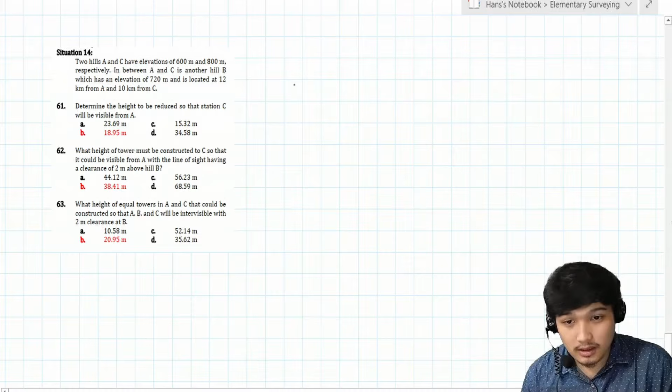I-clarify ko lang, kung paano ba mag-drawing ng horizontal line. Baka kasi ang pagkakaintindi niyo is that yung horizontal line is always ganito yung orientation, talagang horizontal.

Ang pag-drawing ng horizontal line is dependent doon sa vertical axis. Sa case na to, itong horizontal line na to is applicable kapag ganito yung surface. If the surface is horizontal, therefore yung vertical dyan is pag ganito. So with respect sa vertical, yung horizontal line o yung line of sight ay drawn perpendicular sa vertical axis.

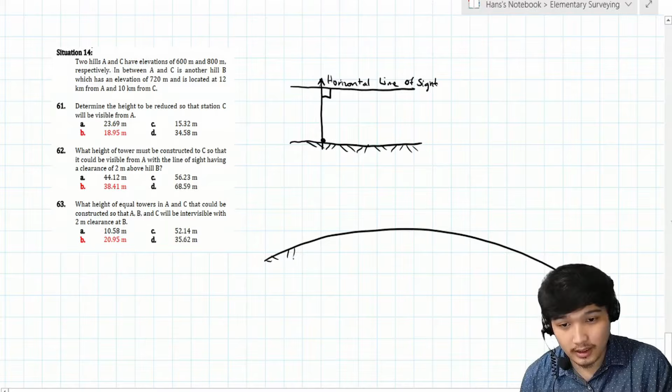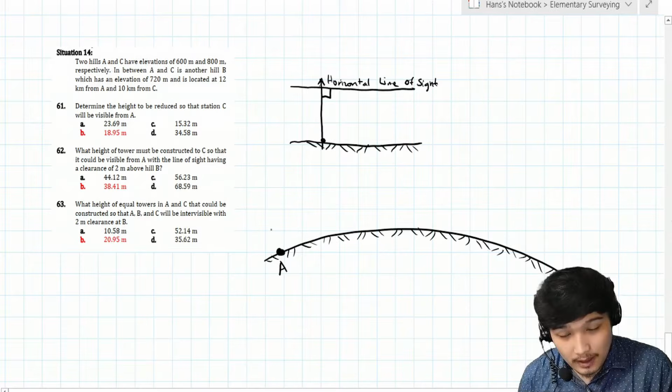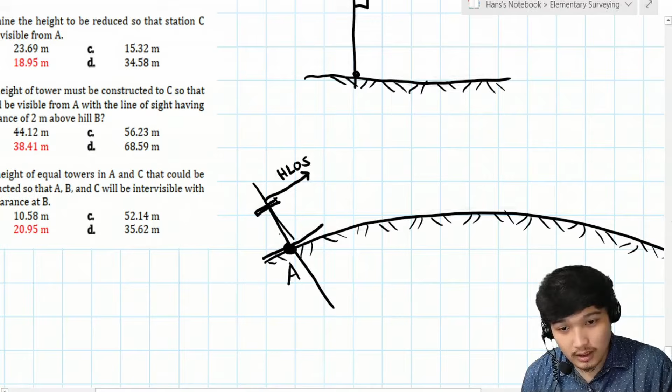Sa cases na may effect na yung curvature, i-consider natin itong point na to, let's say point A. Ang gagawin natin ay mag-drawing muna ng vertical axis dito, na perpendicular sa tangent line dito sa A. So ito yung tangent line at A, at ito yung vertical axis niya. Kaya yung horizontal line of sight with respect sa point A ay ganito, katulad nung tangent line. Kung ano yung direction ng tangent line, ganun din yung horizontal line of sight. Ito yung horizontal line of sight kapag kino-consider natin yung instrument at A. Gets ba yan? Practice pa tayo.

Let's say ito, point B. Drawing tayo ng instrument. Mapapansin mo dyan, ito yung vertical axis naman niya, drawn perpendicular sa vertical axis. So ito yung kanyang horizontal line of sight. And then, ito sa C.

Drawing tayo ng vertical axis. Therefore yung instrument nakaganito. Again, drawn perpendicular sa vertical axis. So ito yung kanyang horizontal line of sight. Hindi siya laging horizontal.

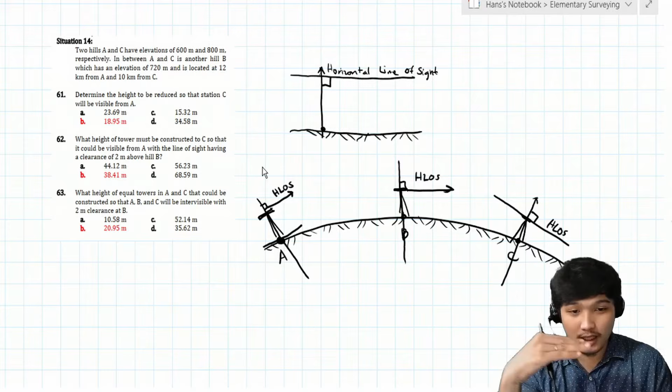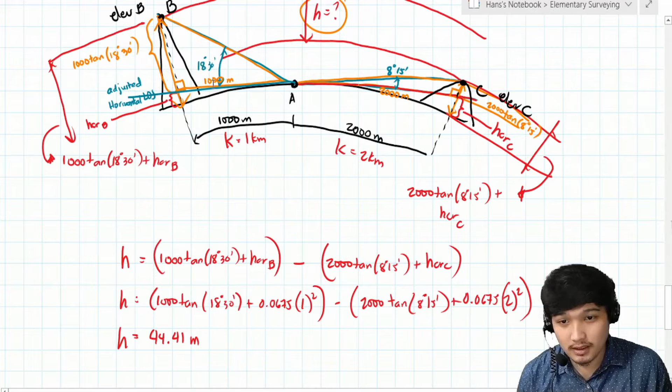Yun yung naiisip niyo, pero depende siya sa surface. Kaya kung babalikan natin, let's say ito yung pinag-uusapan is point A. Nakikita mo, yung horizontal line of sight dyan ay para talagang horizontal. Habang dito, kasi hindi ko na-discuss yata sa previous video ko, kung mapansin mo, itong horizontal line of sight na to ay parang hindi naman siya horizontal. Pero kasi yung instrument na i-a-analyze ay at point A.

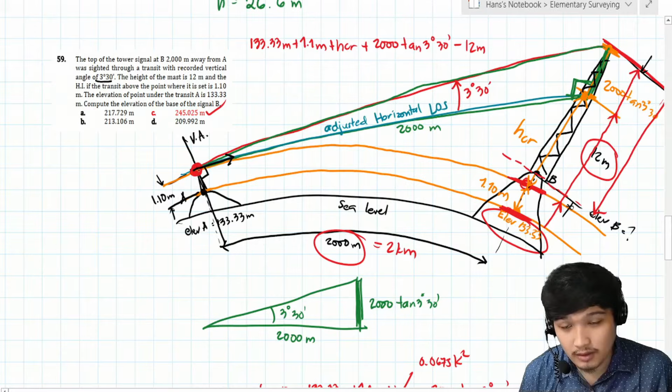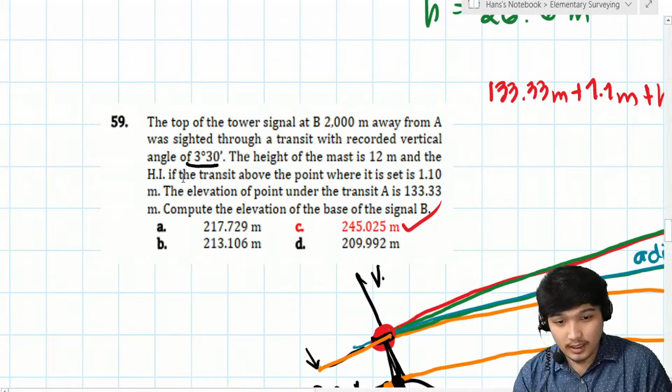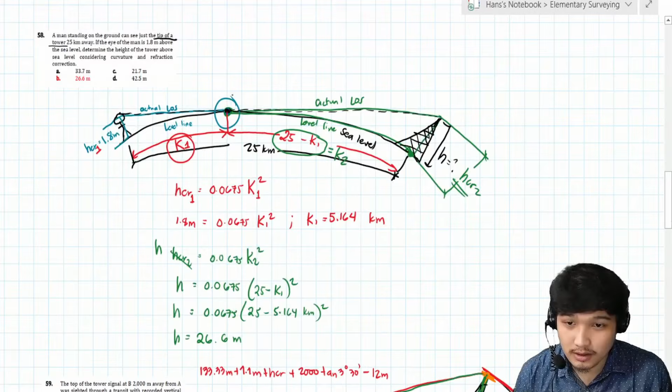Kaya therefore, perpendicular sa surface at A, ito yung vertical axis. So ito yung magiging perpendicular sa vertical axis na yun, which is yung horizontal line of sight ng instrument at A. Sana gets yun. Burahin ko lang. So dito, yung kino-consider, yung point na tumama sa surface ay itong nasa gitna. Yung horizontal line dyan ay ganito yung orientation niya. Sana nagets na kung sakaling naguguluhan ka kung paano mag-drawing ng horizontal line of sight.

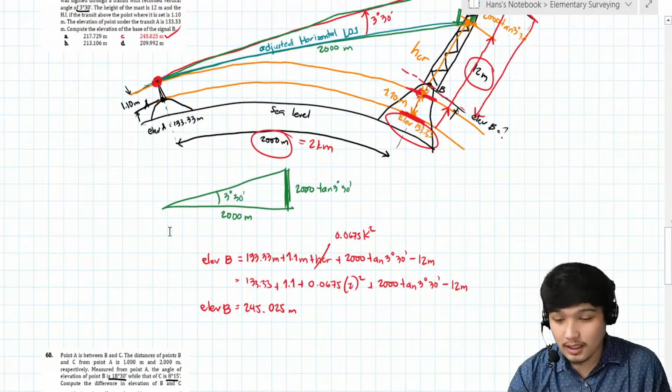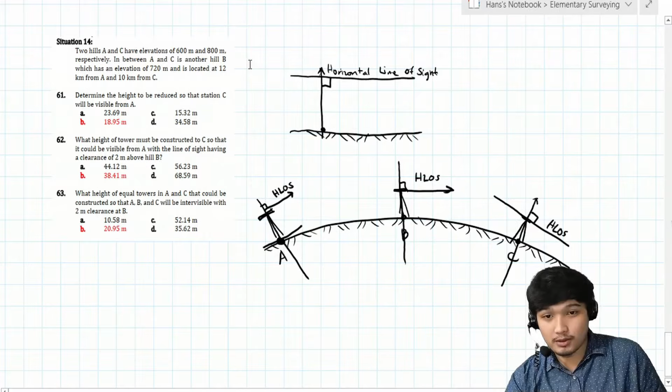Proceed tayo sa discussion ng last sample problem natin, application ng curvature and refraction sa ating measurement. Burahin ko to.

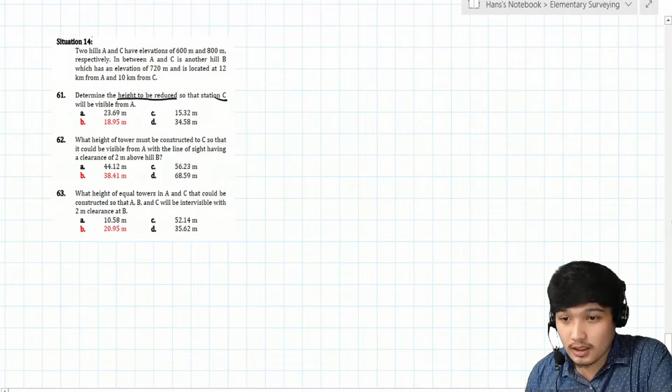Sabi dito, two hills A and C have elevation 600 and 800 meters respectively. In between A and C is another hill B which has an elevation of 720 and is located 12 kilometers from A and 10 kilometers from C. Tinatanong: determine the height to be reduced so that station C will be visible from A. Next, what height of the tower must be constructed at C so that it could be visible from A with line of sight having a clearance of 2 meters above hill B. And then, what height of equal towers in A and C could be constructed so that A, B, and C will be intervisible with 2 meter clearance at B.

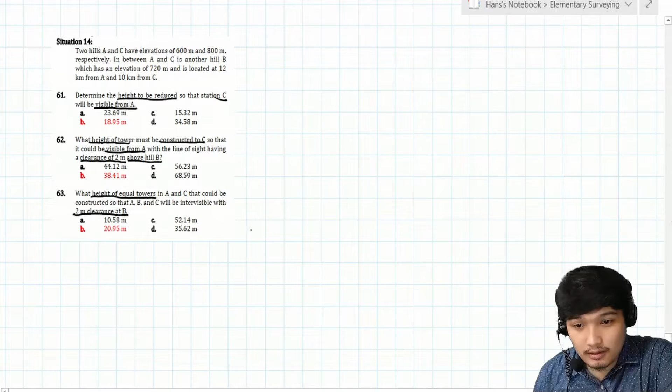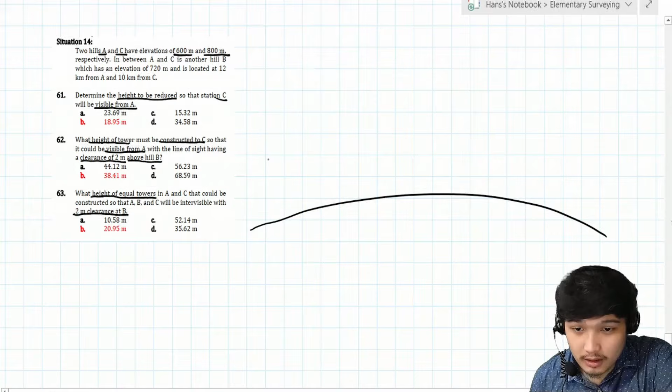I-analyze muna natin yung mga binigay na given. Let's say ito yung sea level muna tayo. Hill A, 600 meter elevation, at hill C is 800 meter elevation. Drawing ko siya pag ganito. Ayan, yung elevation niya, itong height na to ay 600.

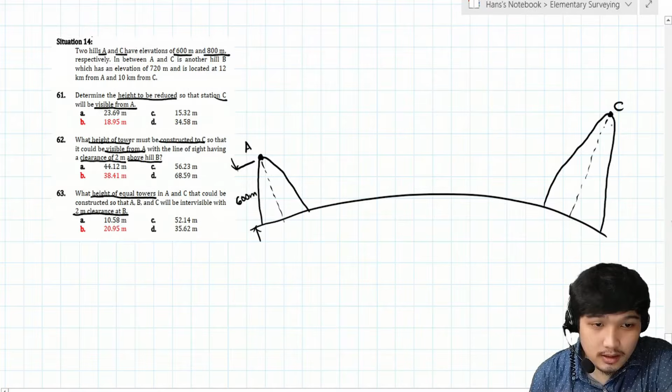While yung sa C, let's say, somewhere here, dito siya located. So, ito yung C. So, lagay ko to A. So, C. So, ang height naman niya is 800. So, nakikita ba? Okay. So, sabi, in between A and C is another hill B which has an elevation of 720. So, 720.

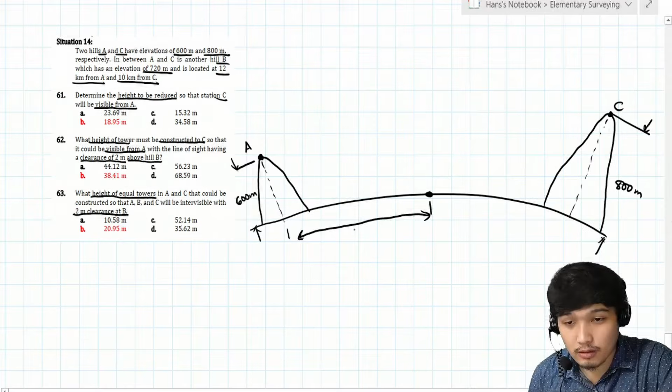So, let's say, ano ba yung location class? So, sabi, di ba, located siya 12 kilometers from A and 10 kilometers from C. So, let's say, dito na lang siya, no? So, lagay natin yon. So, from A. So, pinakita ko class na curve na yung surface kasi nga, malalayo na yung mga distances na involved. Okay, so, malaki na yung chance na may effect yung curvature dito sa ating mga measurements. So, ito is 12 kilometers and then ito is 10 kilometers. Okay, so drawing tayo dito ng hill na around 720. So, let's say, ayan. So, B. Then, ayan, no? So, 720

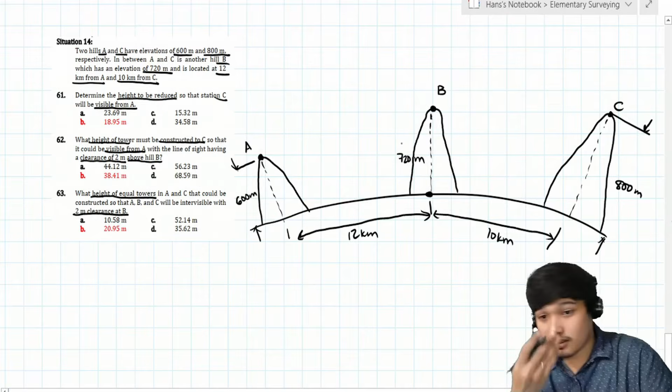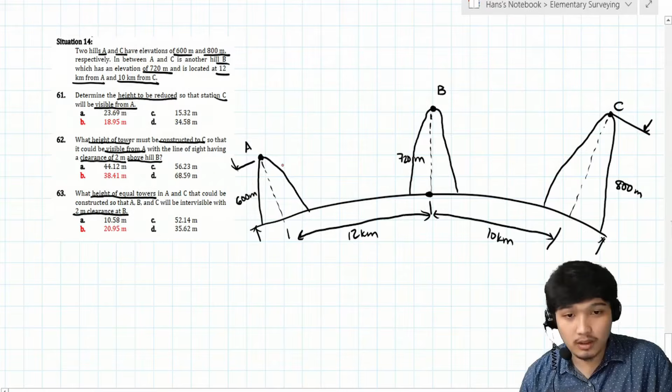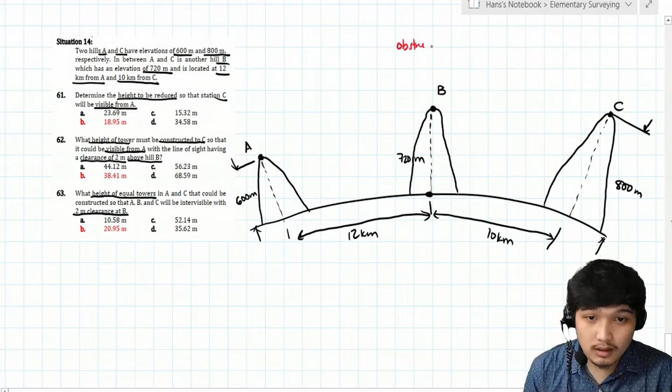meters. So, ang tinatanong dito class, no, is determine the height to be reduced so that station C will be visible from A. So, ang gagawin pala class is from A, isa-site niya yung C. So, class, sa problem na ito, merong two possible cases. So, yung isa is that yung B is maging obstruction siya. So, sulat natin. Or may clearance.

Okay, pag sinabi nating obstruction, so ibig sabihin na hindi niya class makikita yung point C, no, from A kasi may harang. Yun nga, obstruction siya. So, nakaharang yung hill B. So, hindi visible ang point C from A. So, kapag naman may clearance, so ibig sabihin, yung line of sight is makakatawid siya from point B. So, ngayon, since sinabi naman sa atin na height to be reduced, so baka ano siya class? Obstruction. Okay? So, assume natin na obstruction siya.

So, yung line of sight natin is ganito. Ayan. Okay, so ito na yung line of sight, no, from point A to point C. So ito yung tinatanong sa ating class. Ano yung height na kailangan nating ibawas sa hill B para maging visible yung point C from point A. So, class, paano sagutan yung ganitong type ng problem? So, simple lang, class, no?

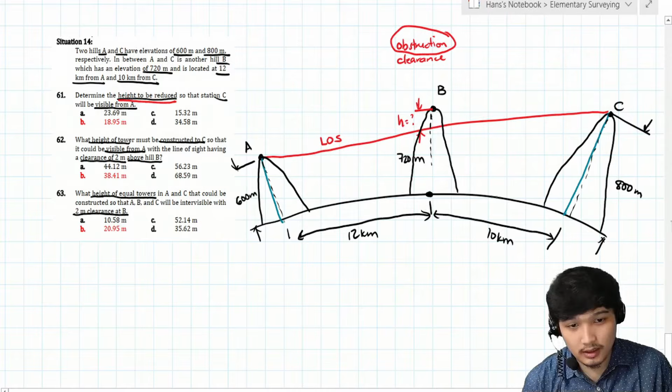So, kung mapapansin mo, class, sa figure natin, para tayo may trapezoid dito. So, ito yung isang side. Ito yung isa pa. And then, yung line of sight na to. And then, itong sa baba na naka-curve. So, parang may trapezoid, class, kaso hindi talaga siya trapezoid. So, ang gagawin natin, class, i-convert natin yung figure na yan into its equivalent trapezoid. So, imbis na curve sa baba yung gagamitin natin.

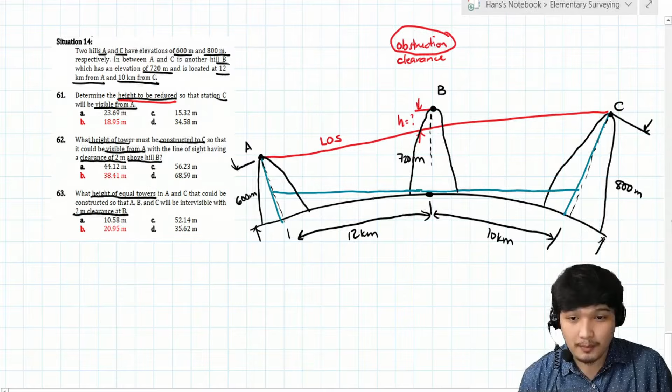So, mag-drawing tayo ng tangent line dito sa point sa may B. So, drawing tayo ng tangent line dito. Ayan, tangent line. And then, extend natin. So, assuming yan yung parang horizontal line. Okay, horizontal line of sight drawn at point B. So, ayan. So, therefore, class, etong height na ito will become yung HCR nung A measured from B.

So, di ba, class, ito yung horizontal line natin, drawn at B. And then, makikita mo, yung horizontal line of sight is again, lumalayo na naman siya dun sa etong level surface. So, ibig sabihin, yung paglayo niya na yon is denoted by the HCR and then A, para sa HCR for point A. So, therefore, ang gagamitin natin K distance dyan is ito. Okay, which is yung 12 kilometers. So, KA. So, pag nakuha natin yan, class, makuha na natin tong equivalent height dito sa side, sa may A nung trapezoid natin.

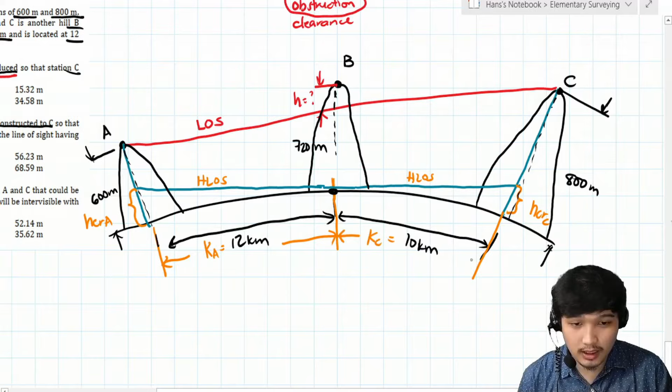Okay, so let's say dito naman tayo sa kabila. So, again, from the horizontal line of sight from B, lumalayo na naman siya from the level surface. So, yung paglayo niya na yun is yung HCR and then for C naman. So, ang gagamitin natin, class, na K value is from B, again, papuntang C. So, ito yun, no? KC equals 10 kilometers. Okay, so kunin muna natin yung mga values ng HCR. So that HCR A is equal sa 0.0675 of KA squared. So ilan to, class? So that is 9.72.

So, ibig sabihin, i-deduct natin yan doon sa initial elevation, na 600. Okay? So, next, yung HCR C. So, that is 0.0675 of KC squared. So, ilan yan, class?

So, that is 6.75 meters. Okay, so let's draw the trapezoid that I'm referring to, class. So, at A, it's just this. Let's put the A here. And then, at C, this is it. And then, this is the horizontal line drawn at B. And then, this is the line of sight from A to C.

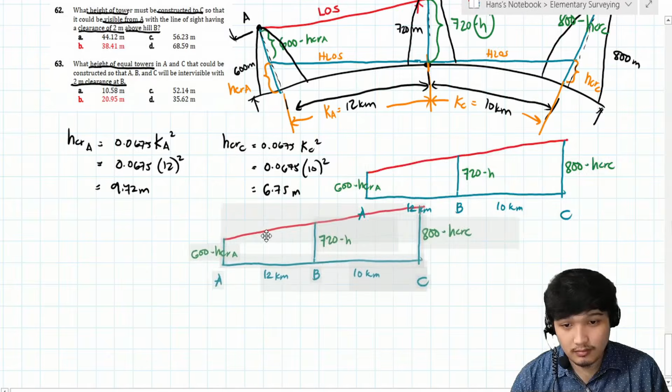So, class, we can now convert these to their numerical values. We just subtract the HCR. So, wait. Okay, so let's subtract to get the equivalent value of this one, class. This will be 590.28. How about this one? That is 800 minus 6.75. So, that is 793.25.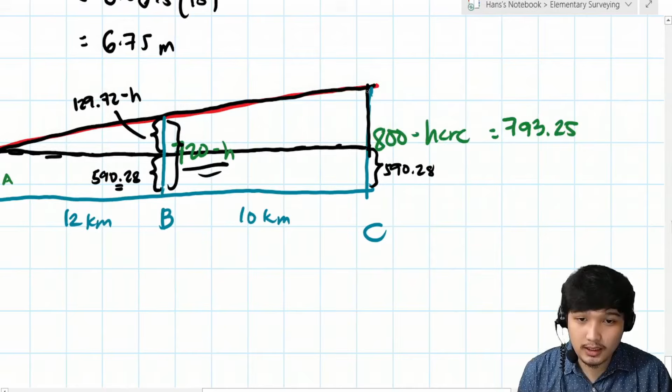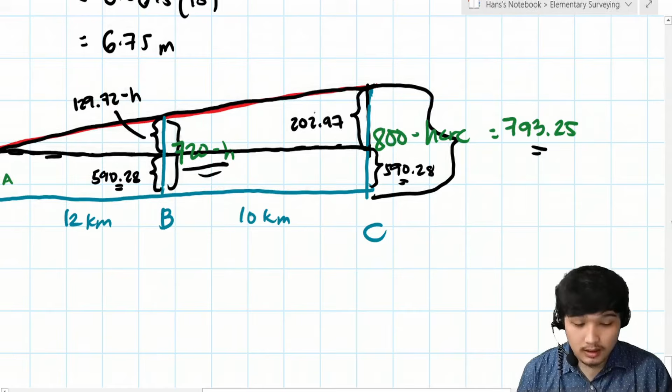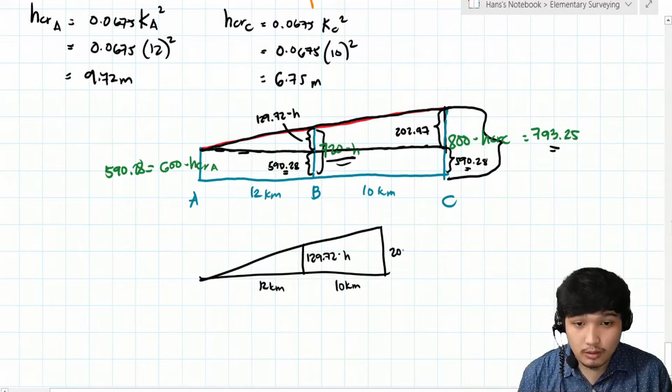Okay? So, how about this one? If the total height is 793, and the bottom is 590, then the height for the triangle is 793.25 minus 590.28, which is 202.97. Okay, so we are close to getting the value of height h. Let me extract the triangle. So, we have this one: 12 kilometers, 10 kilometers, 129.72 minus h, and 202.97. So, there, class, by ratio and proportion.

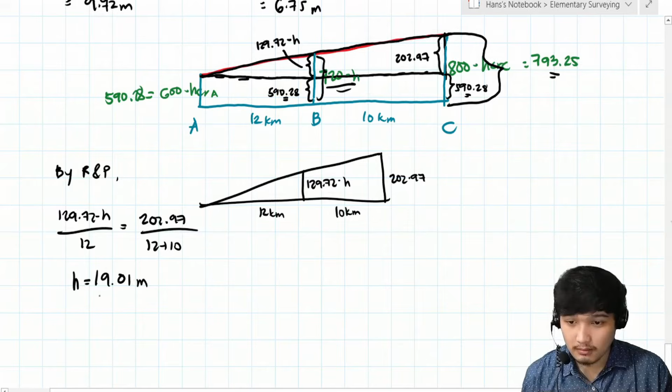So, how much is h? Okay, so height is to base. The height, 129.72 minus h, over 12 is equal to the height of the larger triangle, which is 202.97, over the base of the larger triangle, that is 12 plus 10. So, solving for the value of h, how much is it? The answer is 19.009 or 19.01 meters.

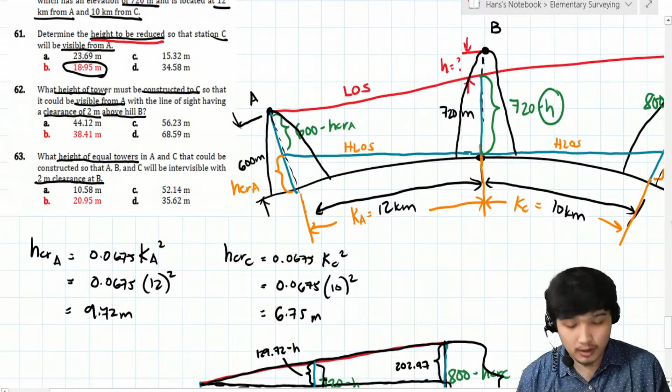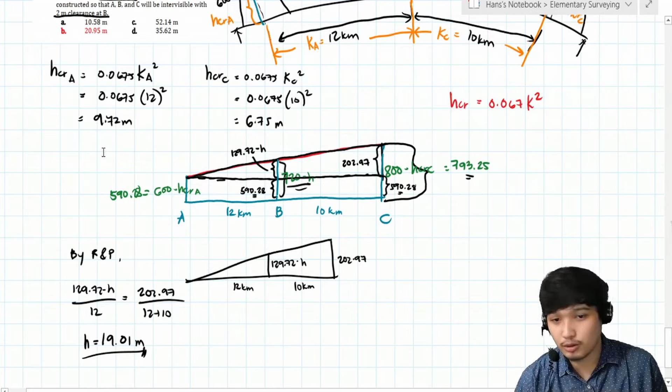Okay, so if you notice, class, our answer is close to the final answer of 18.95. So, we are not wrong, class. The value of HCR that we used is 0.0675. Actually, class, there are times that the formula used for HCR is 0.067 of k squared. So we can try, instead of 0.0675, to use this 0.067, if you just want to verify that our answer is correct. But among the choices, I think we are very close to B. So, if you want to try it, class, use the same solution and prove that we are right. I'll leave that to you.

So, ang gagamitin ko na lang class is ito na lang ulit na na-solve natin. So, malaki ang chance na ang mga masolve natin, so sa mga next questions pa, 62 and 63 is may konting discrepancy ulit dun sa final answer. So, let's proceed. Saan na ba tayo?

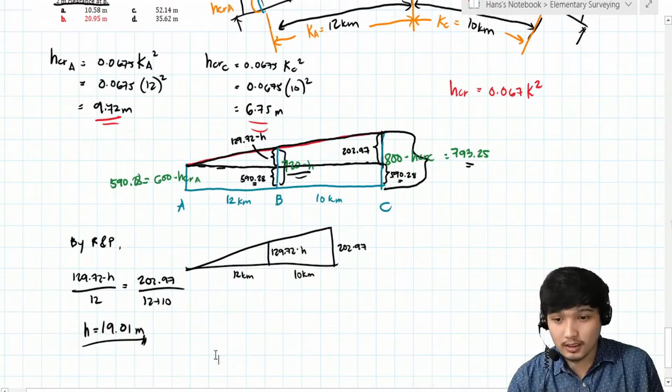So, yun, ito yung kailangan nating ibawas dun sa B in order to make point C visible from point A. So, next question is, what height of tower must be constructed at C so that it could be visible from A with the line of sight having a clearance of 2 meters above hill B.

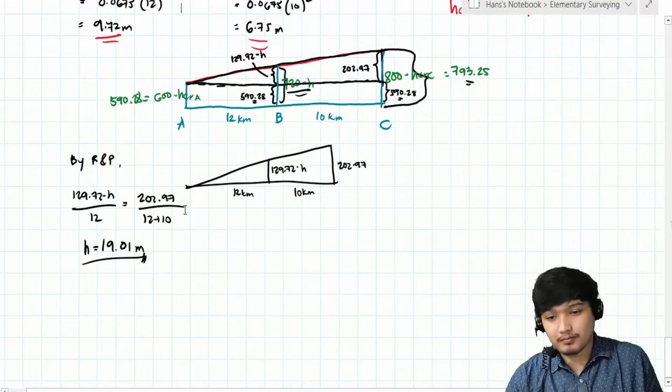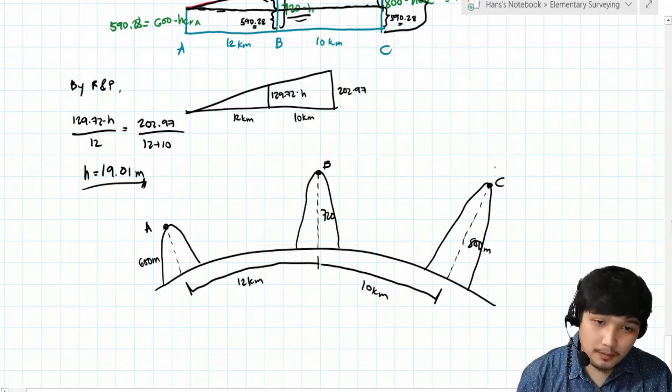Okay? So, i-redraw lang natin class. Okay, so yan yung figure, no? So, base sa statement ng problem, maglalagay daw siya ng tower at C. Kasi nga, kung the same orientation, hindi mo makikita yung point C since yung hill at B is nagiging obstruction. So, para makita, maglalagay daw siya dito ng tower. So, ang tinatanong, ano daw yung height ng tower na ilalagay niya?

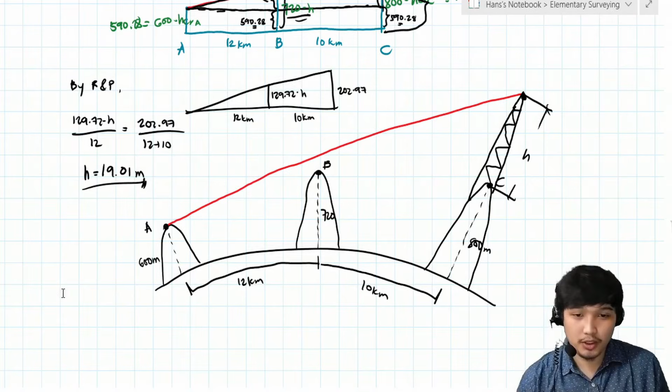In order na kapag sinilip niya yung tuktok ng tower na to from point A, gagawa tayo ng line of sight. So, let's say, pa ganito. Okay, adjust ko lang class yung tower ko. Okay, ayan. So sabi, kapag sinight niya yung top of the tower at point C, magkakaroon pa daw ng clearance sa B. So ito yung clearance class which is equal sa, anong sabi? 2 meters. Ayan, 2 meters.

Okay, so same procedure lang ang gagawin natin dito class. So gagawa lang tayo ng equivalent trapezoid. So ang best na gawing reference is itong sa B. So drawing tayo ng tangent line at B. So ayan. And then ito yung ating trapezoid. Okay, i-drawing ko lang sa baba yung magiging trapezoid natin. So ito yung base, ito yung mga equivalent height, and then ito yung line of sight. So, ito yung A. Let's say yung B is somewhere here. Ito yung C. So, define natin yung mga height, no?

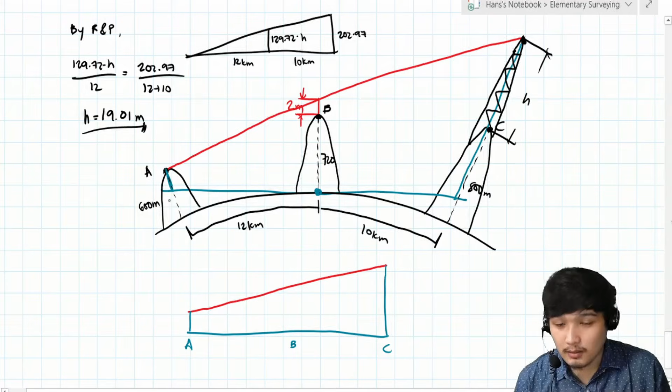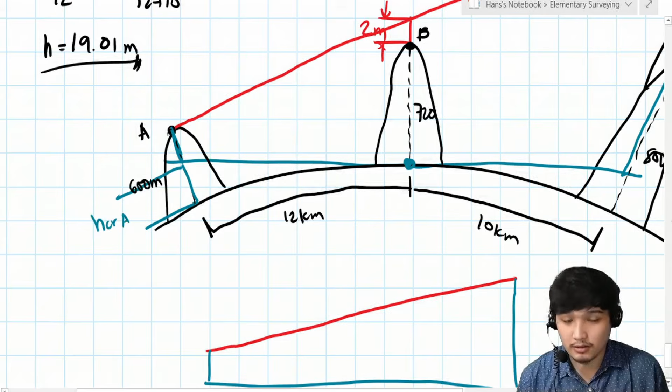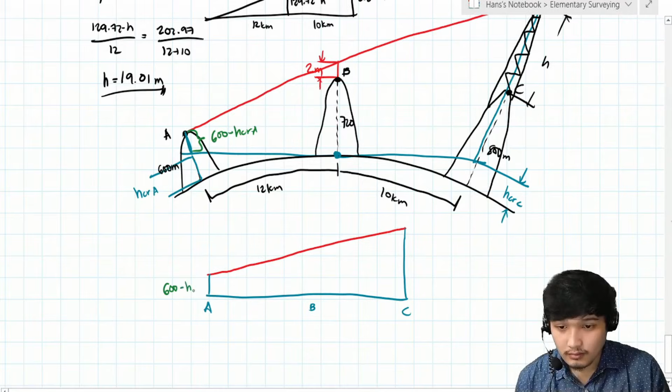So, for A, di ba class, hindi naman magbabago. So, this height is yung ating HCR for A. So, nasolve na natin siya before. So, dito sa kabilang side, ito is yung HCR for C. So, para dun sa dimension ng trapezoid, ito magiging 600 minus HCR A. How about dun sa C? So, sa C, hindi na siya class na 800 minus HCR C kasi ito na yung height na kailangan natin, di ba? Itong height na ito. So, equivalent yan class saan? Di ba ito 800, ito yung H, ito yung HCR. So, that is 800 plus yung H and then minus yung HCR for C. So, yun yung height dito.

And then, sa B, ano yung height dito class sa gitna? Okay, so, anong height dito? So, given that this one is 12 kilometers, ito is 10 kilometers. So, that is what? So, ito 720. Ito is 2 meters na clearance. So, that is 720 plus 2 meters. So, that is 722. Okay, so sana nasundan class.

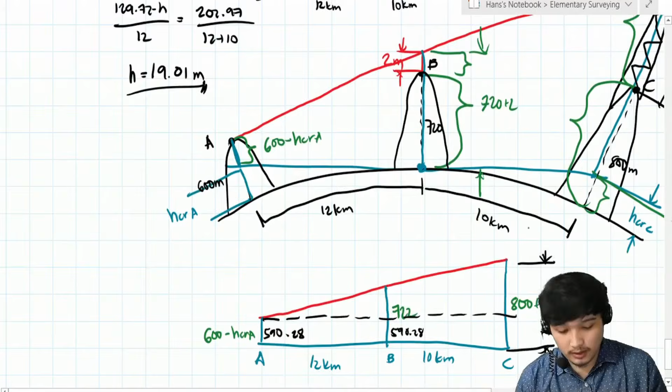So, with that, pwede na ulit tayong gumamit ng ratio and proportion ng triangular dimension na itong ating trapezoid. So, ito siya, no? So, zoom in natin. So, simplify muna natin to class. Ilan ito? Yung height sa may point A. So, that is 600 minus 9.72, which is 590.28. Okay, so therefore, ito is 590.28. Ganon din dito. Pero yung total height, ilan ba yung total height niyan, class? So, that is 800 minus 6.75. So, still, ito is magiging 793.25 and then meron lang siyang plus H.

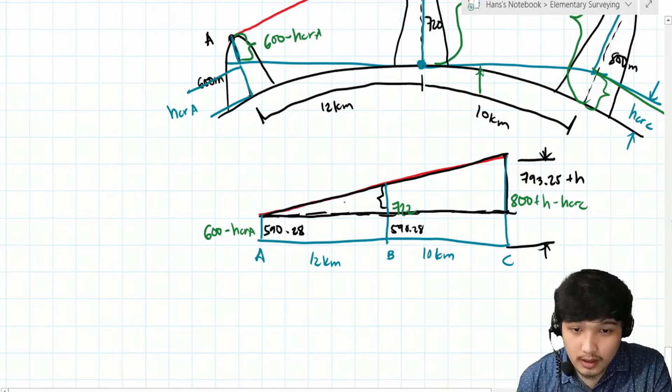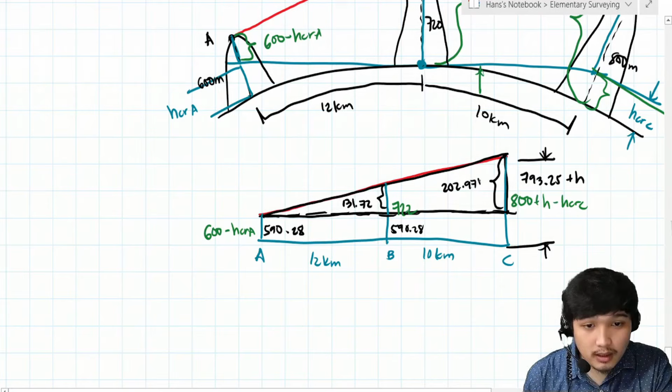Okay, so, dito tayo sa triangle na dimension. So, itong sa gitna, ito is magiging 722 minus 590.28. Ito is magiging 131.72. How about this one? So, ito magiging 793.25 minus 590.28. So, magiging 202.97 and then may plus H. So, ayan class. I-redraw lang natin.

Okay, so by ratio and proportion, we have 131.72 over 12 and then 202.97 plus H divided by yung base nung malaking triangle, which is 12 plus 10. So we have what value of H? So sagot is

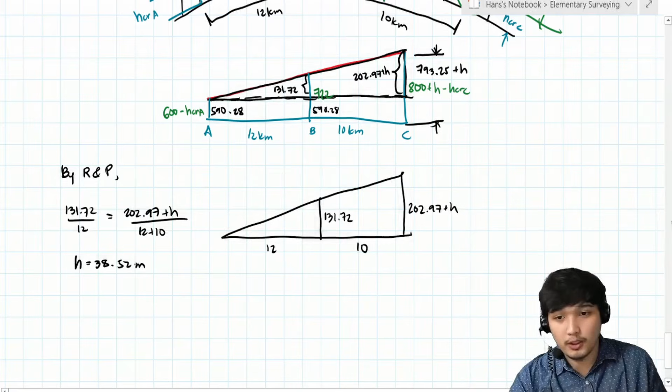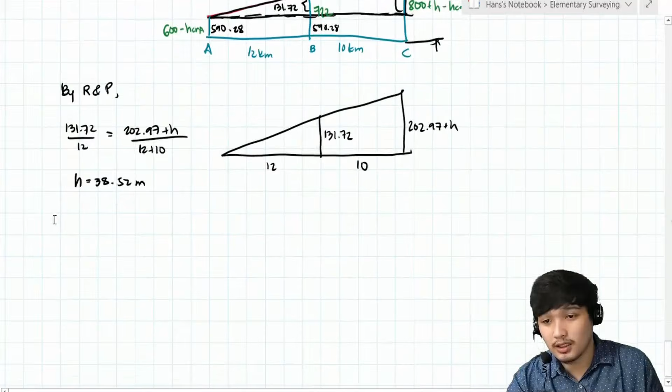38.52 meters. So this one is using yung 0.0675. So check natin kung malapit siya. Okay, so malapit 38.52 sa 41. So, acceptable na yun, class. So, correct. So, last problem tayo, class.

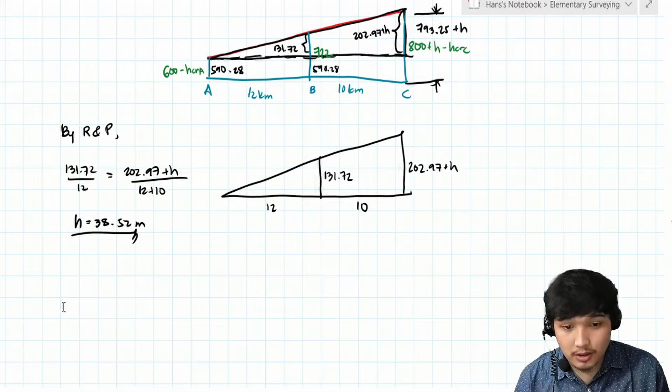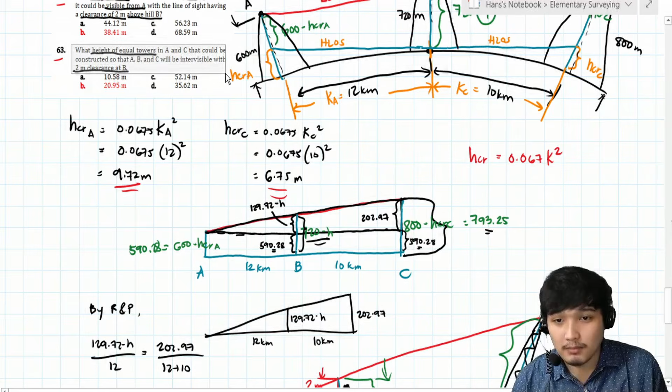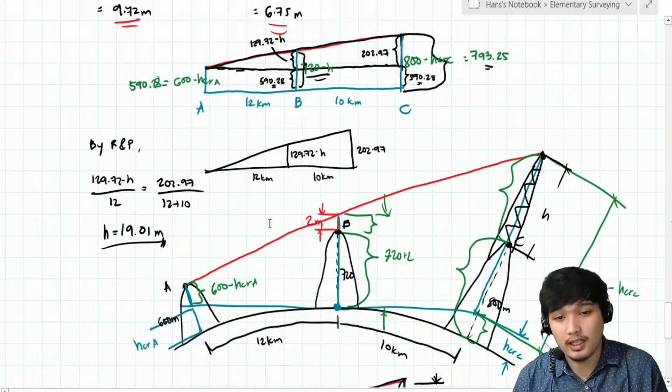Regarding sa effect ng curvature and refraction. So sinabi naman dito, no? What height of equal tower in A and C that could be constructed so that A, B, and C will be intervisible with 2 meters clearance at B. So dito, class, hindi na lang siya sa C naglagay ng tower. So maglalagay rin siya ng tower sa A with the same clearance at hill at B. So drawing natin yun, class.

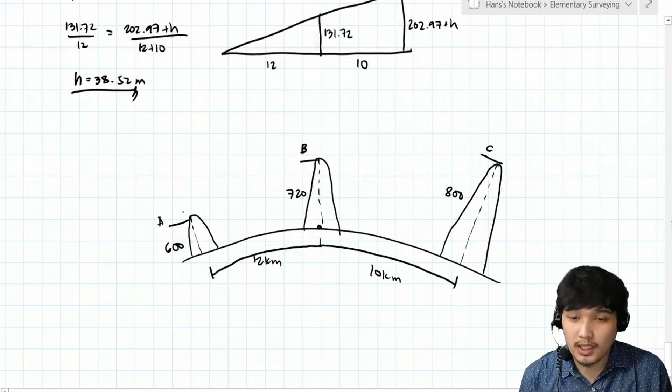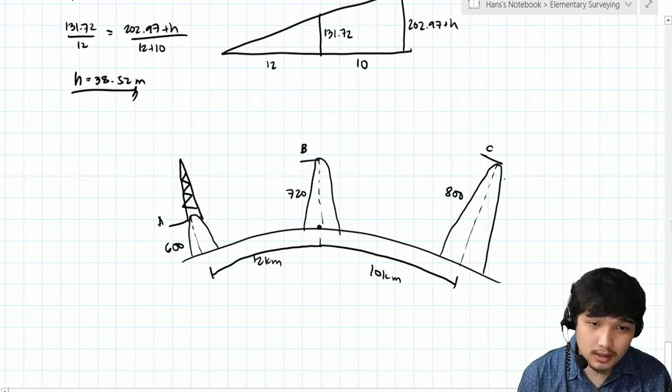Okay, so ayan siya, no? So maglalagay daw tayo, class, ng equal tower. So let's say ito 'yon. So kung anong tower ilagay ko diyan, class, yun din yung tower na ilalagay natin sa C. So same height sila. Okay, so let's say ayan. So tinatanong yung height ano? So lagay natin to height h. So ito height h na rin. So kapag daw sinight niya from the top of tower from A to top of tower from C, so ito yung magiging line of sight niya. Okay, so tumugma. So sabi, kailangan daw merong clearance at B na 2 meters.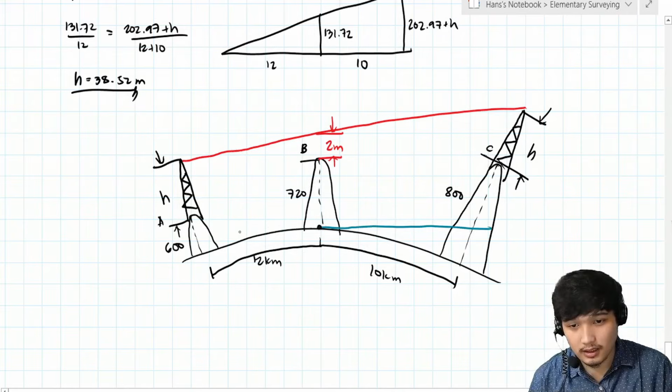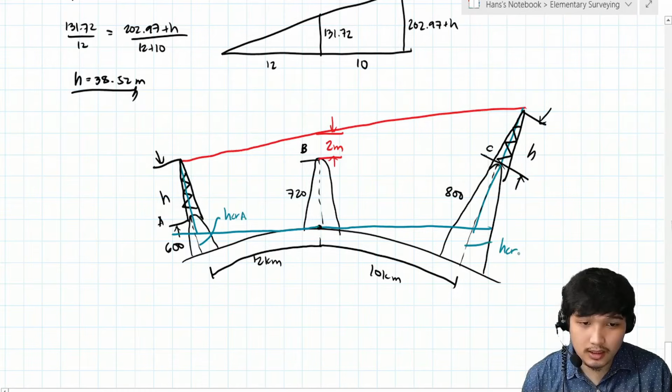So again, ko-convert lang natin yan, class, sa equivalent trapezoid using yung horizontal line drawn at the base of B. So ito. And then ito. So kunin lang natin yung dimension ng trapezoid. Okay. So still sa baba, ito is yung HCRA pa rin. And then ito is yung HCRC. So ayan. So yung converted trapezoid is ito na siya. Yung line of sight is ayan. So kunin lang natin yung dimension again. So for the left side, no, sa A, so this one is 600 plus H minus HCRA. Okay? Dito sa C, this one is 800 and then plus H and then minus yung HCRC. So sa B, which is somewhere here, so this one is 12, this one is 10. So sa B, that is 720 plus 2.

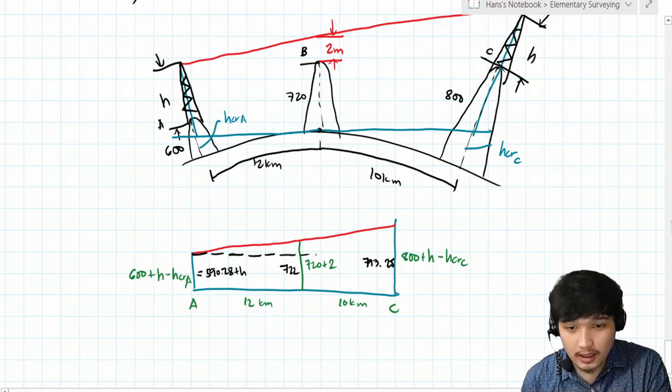Okay, so we know, no, meron na ulit tayong same value ng HCRA sa HCRC. So ilan yung equivalent height nito, numerical height. So that is 600 again minus 9.72. So still 590.28 and then may plus H dito. 722 and then sa side C, that is 800 minus 6.75. So magiging 793.25. Then again, consider natin yung triangle. Okay, so ilan ulit yung mga dimension nito, class? So itong sa B, this one is 722 minus yung 590.28. So that is 131.

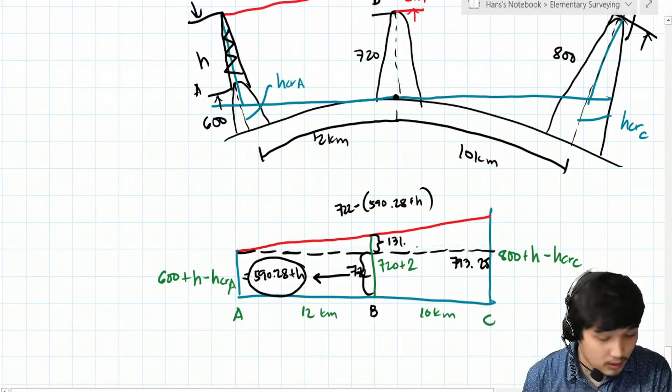Okay, so wait lang. Baka malito tayo, class. So take note, no, yung height na ito is may plus H na siya. So therefore, para makuha natin yung small dimension sa may B, let's say ito yung B. So that is yung initial height niya na 722 minus yung ito, which is equivalent nga yan dito sa 590.28 and then plus H. Okay, baka lang kasi maiwanan natin yung H. So that's 722 minus 590.28. So, yun nga, yung 131.72. And then, ito pang minus h. So, lagyan natin, minus h.

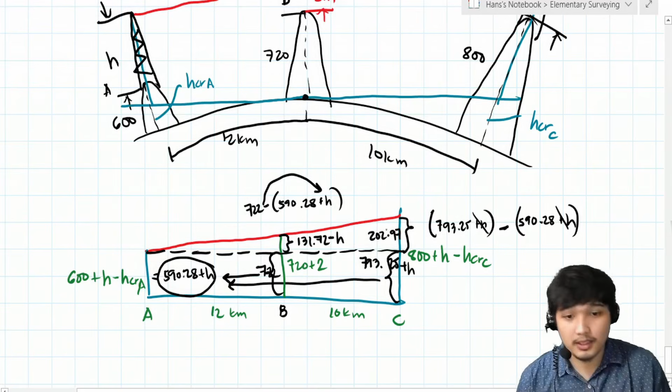Nakuha? So, dito naman, no, yung total height niya is ito. Or kulang pala yung nasulat ko, no? So, 793.25. Dapat meron siyang plus h. So, yung matitira dito is yung initial height niya na 793.25 plus h minus yung sa baba na to, which is still the same dito. So, 590.28 plus h. So, magka-cancel yung h dyan. So, magiging 793.25 minus 590.28 na lang. So, that is 202.97. So, sana nakasunod, class.

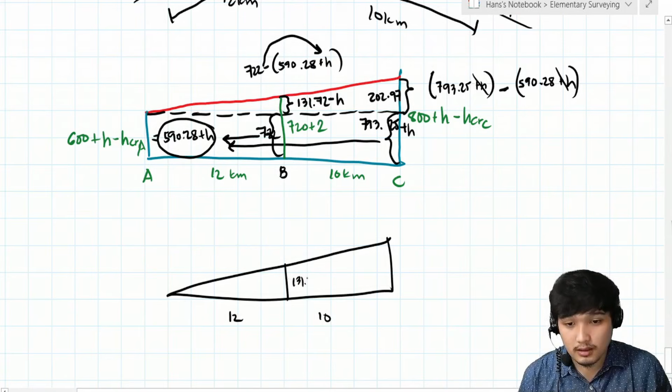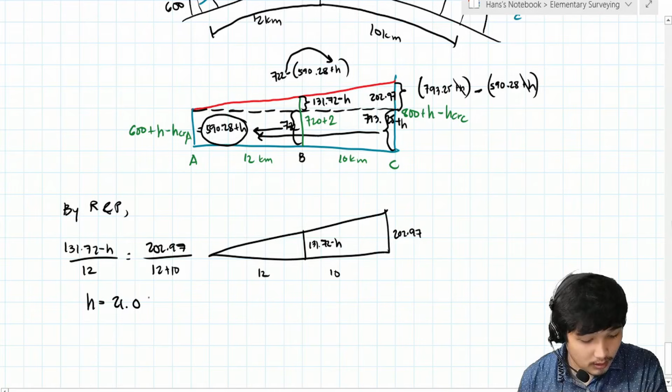So, i-redraw natin yung triangle. So, let's say, ayan na lang siya. So, 12, 10, ito is 131.72 minus h, ito is 202.97. So, with that, masasolve na natin, no, yung height of the tower by ratio and proportion. So, by ratio and proportion, we have 131.72 minus h divided by 12. And then, for the larger triangle, so that is 202.97 divided by 12 plus 10. So, ayan. So, ilan ang height h, class? So, sagot is 21.01 meters. Okay, so meron kayang malapit sa choices. Okay, so 20.95.

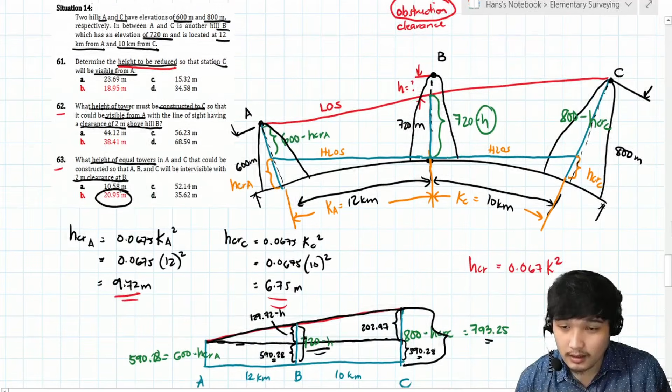So, correct, no? Correct yung mga sagot natin. So, ayun, class. So, hanggang dyan na lang siguro, no, yung discussion natin regarding sa effect of curvature and refraction sa mga vertical measurements natin. So, sana na-gets nyo siya. So, sa next video natin, class, pag-uusapan naman natin, no, yung mga error naman na ma-encounter natin sa measurement of angles naman. Okay? So, ayun.